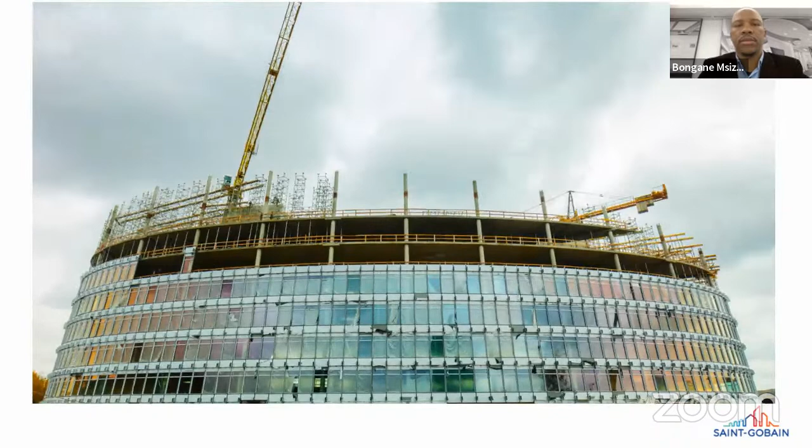Customer proximity: we commit, beyond our local footprint, to always be by your side as a reliable, expert business partner. Innovative solutions: we commit to constantly anticipate your needs and bring added value solutions. Performance: we commit to respond to your challenges by bringing trusted solutions which offer productivity, financial benefits, and quality finish, delivering the expected performance. Sustainability: we commit to care about people by making installation and indoor environments more comfortable and safer, and to care for the planet by reducing buildings' environmental impacts. Everywhere, every day, we care about building better for people and the planet by offering solutions that deliver sustainability and performance to drive the transformation of the construction market, making the world a better home.

Thank you for that, I hope you've all enjoyed the short clip. This basically gives you an overall summary about Saint-Gobain's offering and positioning in the market in driving sustainability, with innovative solutions that are performance-driven, with a key focus being sustainability.

So I'd like to take this opportunity to break it down with our key focus areas, which is customer proximity — in all that we do, we will be there to support you in projects that need our solutions, and we will walk the journey with you. Innovation — we are constantly innovating, responding to the needs of the market, so Saint-Gobain develops solutions that are fit for market with the key focus being sustainability.

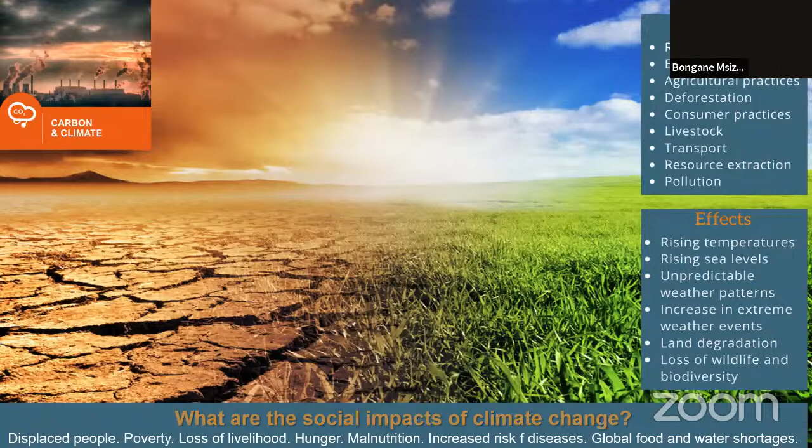Looking at the three pillars in the sustainable built environment, we're looking at carbon and climate change, resources and circularity, and health and well-being. With carbon and climate change, one would ask about the different causes and effects. In summary, what are the social impacts of climate change? We're all aware of the recent change in climate, which has resulted in some areas experiencing loss of livelihoods, hunger, malnutrition, increased risk of diseases, global food and water shortages, and displaced people. So we have a key role to play in mitigating and addressing some of these challenges.

How do we do that? When you look at resources and circularity, we should have an interest in understanding the production processes and how we acquire our products. Through that process, we can understand what opportunities exist for producing new, recovering existing, recycling, or reusing, thereby reducing the need for waste generation. It's critical that we understand that process, and from the supplier and manufacturer's perspective, understand what their product presents - the lifespan, opportunities for reuse for different purposes, recyclability, and how we can reduce waste generation on our sites.

The health and well-being pillar, we're looking at a summary here, we'll go into details later for each component. We're looking at cleaner air quality, which has a lot to do with indoor air quality, because we spend about 90% of our lives indoors. Therefore it requires interventions to understand what products have to do with the healthiness of the environment and how they affect or improve our well-being. We need to be cognizant that our decision-making in product selection and project implementation does not pose any harm to the end user or occupants of the space. Improved health equity is very important. Net zero commitment - this is the 2050 Paris Agreement.

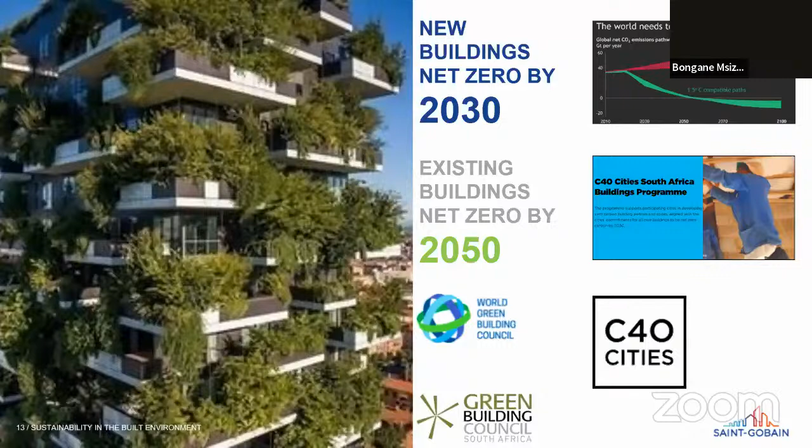These commitments are obviously influenced by the World Green Building Council with the support of Green Building Council of South Africa. Every professional in the space, particularly when it comes to buildings of a particular size, and also the sectors - in this case being public buildings - have the immediate impact where they have to get them to be net zero by 2050 on the existing stock, and any new build should be targeting net zero by 2030.

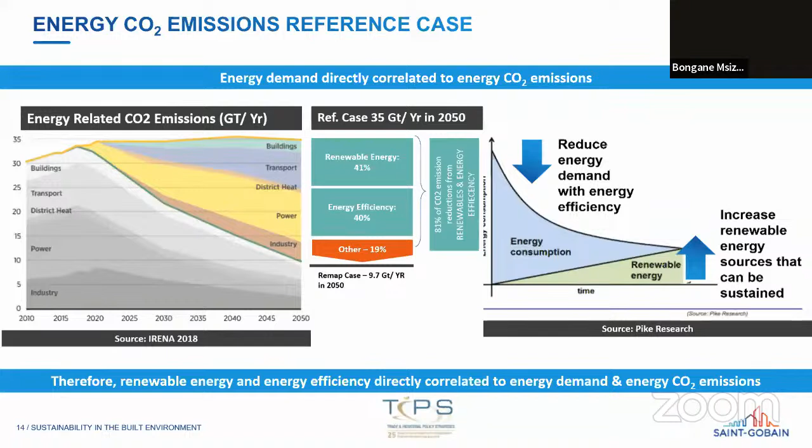This information here is backed up by TIPS in the South African context - this is Trade and Industrial Policy Strategies. So all these agreements are actually driven through various organizations. Buildings are part of the problem, and it's a continuity that we need to put mitigation factors in place.

We use about 33% of energy globally, and it's all in buildings. The image there, for me, I always highlight the fact that you've got a night scene where buildings are all lit, and probably amongst those buildings, not all of them are residential. Therefore, some of them should not be using energy during non-use periods, which requires various interventions as professionals to implement.

Also, about 40% of solid waste is generated on construction sites. Now, that is something we can look into when we explore our resources and circularity - how can we minimize this impact, as we've highlighted, how we can reuse some of those facilities, lessen the need for demolition, and obviously convert them for various uses.

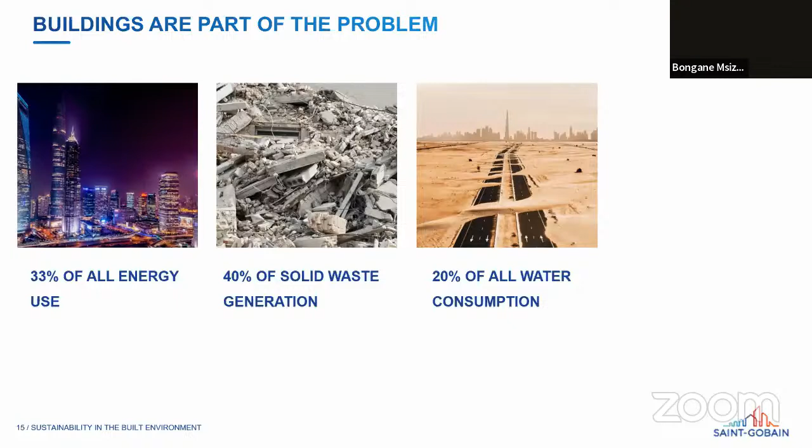20% of all water consumed is in construction as well. Now, this is a very scarce resource - I think the Nigerian market is probably facing the same challenge. Now, this needs to be lessened. And how do we do that? We can deploy alternative building technologies, which will actually reduce the pressure on this scarce resource of water.

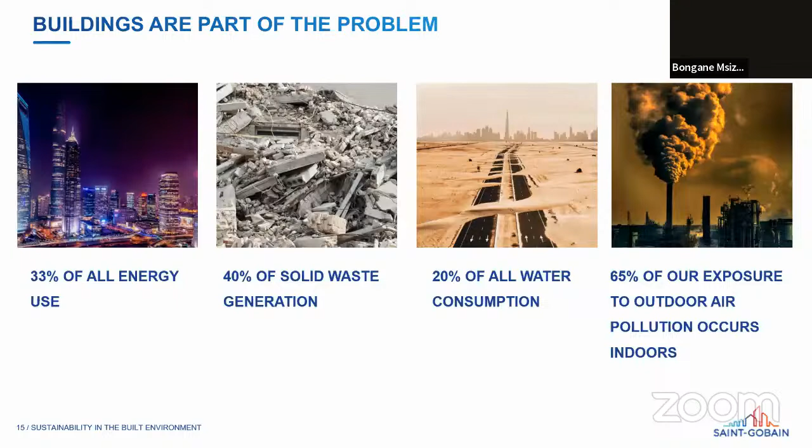With the industrial side, you've got 65% of our exposure to outdoor air pollution that occurs internally. What that means is, with all the pollution that happens externally, it finds its way to affect our lives in terms of indoors. So we need to also have that reduction and put mitigation factors to the exposed percentage so that it does not have a bad reaction to our lives.

Straight into sustainability, we're now going to unpack the various factors and the drivers for sustainable buildings. We see it in two folds from a Saint-Gobain perspective. What does it mean for buildings?

We're looking at sustainability being better for the planet, with a focus on energy and carbon, resources and circularity, and being better for people, looking at health and safety on job sites, as well as health and well-being indoors. On the performance side, we're looking at better economical value, productivity, cost of ownership, and then better quality, reliability and finishing aesthetics, which I think for every building, it has to respond to all of these drivers.

Now, reduced building-related environmental footprint for the planet means we need to take care of our energy and carbon generation and usage thereof. Increased energy efficiency is one key intervention that one can deploy in their projects, along with increased use of renewable energies and reduced embodied carbon emissions.

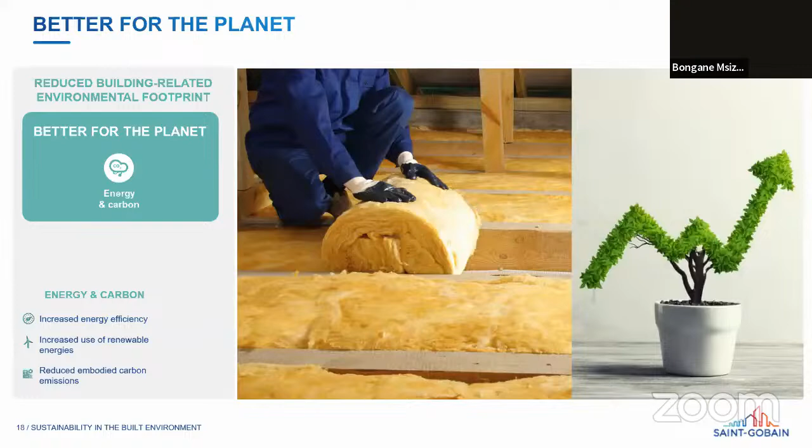So what that means is, as we highlighted earlier when we defined sustainability and why we as architects are affected, is that we need to understand our material selection and what impact they have on the environment and also on the building itself. We need to consider that in our day-to-day actions when we design, and understand what impacts this will have on the planet with regards to energy and carbon emissions.

Expanding on Better for the Planet, from our South African context, we've got energy efficiency, which is driven through sustainability and energy use in buildings. What does that mean? We've got legislation, and I would love engagements because of my non-visibility of what the Nigerian legislation is and what measures are in place. However, this is not limited to South Africa, which is why it's of interest for us to share.

So we aim to reduce energy needed, minimize that whole 33% globally, combat climate change through various interventions, and also have a positive macroeconomic impact with the reduction in energy costs.

Now, this image here would relate to probably most of us, in that the various building elements have a role to play in how they actually minimize or keep the heat for the level of comfort. The various components pose a risk. In this case, your roofing element, you could lose potentially up to 25% if it's not well treated with the necessary solutions. Your walling design, if it's not responsive to the climate, you could also potentially lose about 35%. Windows 10%, doors 15%, and something that is not commonly addressed, your floor, which you have an opportunity to also insulate, minimizing a loss of 15% in energy.

Now, with all of this loss of energy, it requires you to use energy to create some level of comfort. So if we design quite well, and if we design for the climate that we're in, such that it responds positively to the occupants, we can actually minimize all this risk.

Looking at the energy efficient house, it's just a typical image that really highlights various interventions that can be deployed. Not only is it reliant on passive design through building elements, but we can look at high efficiency lighting solutions and appliances as well, which complements the entire envelope of the building. So we have an opportunity there to actually address these challenges through various mechanisms within our space as designers.

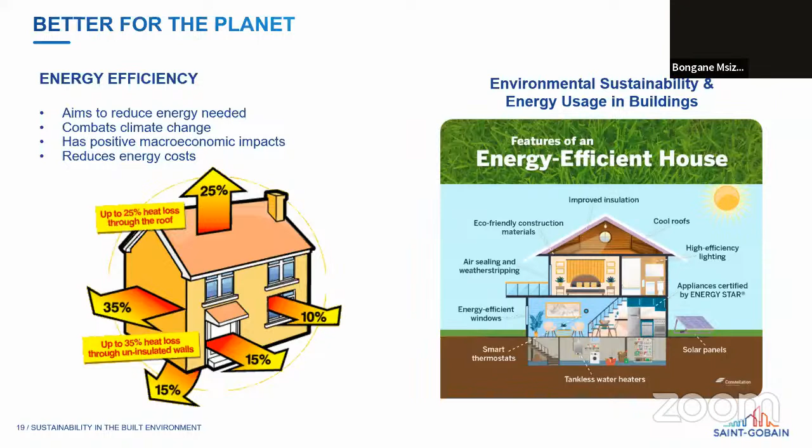I would like to highlight some legislation from a South African context. It's just a brief indication, which I probably believe you might have something similar from the Nigerian market, is that SANS 10400 XA legislation helps us understand and also put measures in place to make sure that our buildings are as energy efficient as possible, and we've got a positive impact towards climate change.

Now, what this means is that an opportunity is always there for new build, obviously, but also we're looking at existing buildings that are actually earmarked for renovation. So at any given stage, when you have a renovation opportunity, you also have an opportunity to actually better improve the level of comfort, make the building as energy efficient as possible, and depending on the level of targets, you can also get some level of Green Star rating to achieve that.

Now there are three ways in how you can actually achieve the compliance. From a South African market, which I think will be similar in the Nigerian market, you've got various energy zones. In this case, we are defined by various provinces, which I think will be something similar in the various states in the Nigerian context.

There are three ways of meeting this. One is to design and construct buildings that are energy efficient through rational design. This would be through the appointment of an engineer or specialist capable of rationally designing a building that complies and meets the required target.

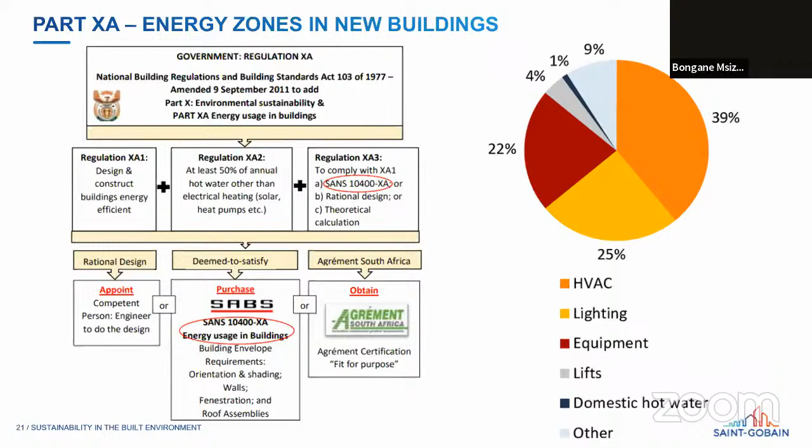Various equipment can obviously be put on timers, only functioning when needed. Lifts can be limited to various floors - perhaps you don't need to use a lift between two floors, except if you're going to the third floor. Such things should be accompanied by legislation; it is a suggestion. Domestic hot water boiling equipment is another area where we can find ways of improving electricity consumption in buildings.

The rationale behind the National Building Regulation in this case is that you also want to look at your biggest energy user in residential buildings, which is your hot water supply. This means the right treatment, making sure your geyser system is well insulated together with the ducting that distributes your hot water, and partially so on the incoming cold water.

Your HVAC systems should also be treated to be as energy efficient as possible, with focus also on your facade system. As much as one could see it as glass looking all beautiful, it has a role to play from an envelope structural point of view in the reduction of need for heating, cooling, and ventilation. So in designing these systems, you need to understand your product selection, what performance it will deliver, and how sustainable it is.

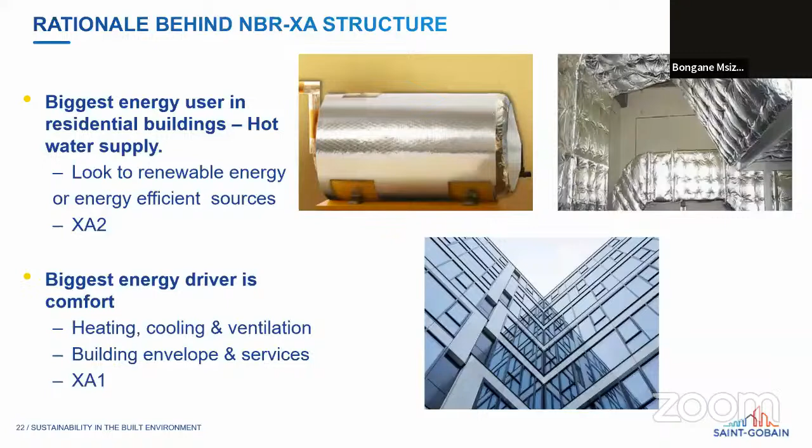There are various ways of addressing this. Again, this is in the context of our space, but I don't think it will be anything out of your context, as we understand the various building methodologies.

From a South African context, there has been a law passed to try to get as many buildings built with a cavity wall as possible, with our SANS revision edition 2. In building that, you can have a different composition of walling for interior and exterior product, but also you can have a combination of one product system.

With an insulated opportunity, you actually get much better performance, looking at the middle diagram here. On the right-hand side, you've got different zones categorized by various provinces and what their energy R-value requirements are, which is mandatory, as you can see there.

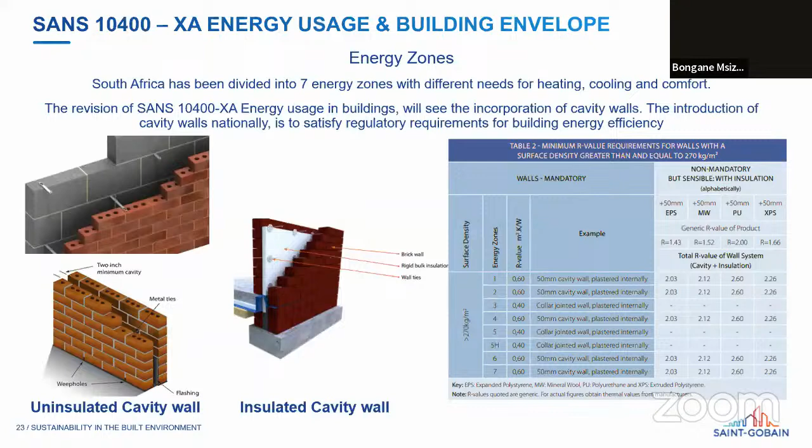So I would also love to understand whether you have some form of guideline to this, to understand what your targeted R-value performance is for your perimeter envelope. It would be very interesting to understand how this would be treated from a Nigerian market context point of view. But I believe it's an opportunity that all of us can adopt, one or two of these solutions, to better improve how we design our buildings.

Some of the alternative solutions are focusing on the left top image.

We're looking at an existing structure here that might not have the necessary required performance. However, you have an opportunity to dry line, meaning improve the perimeter of that wall through various interventions, introducing insulation, but also improving the internal finish, and therefore holistically achieving a whole lot more than just a perimeter wall.

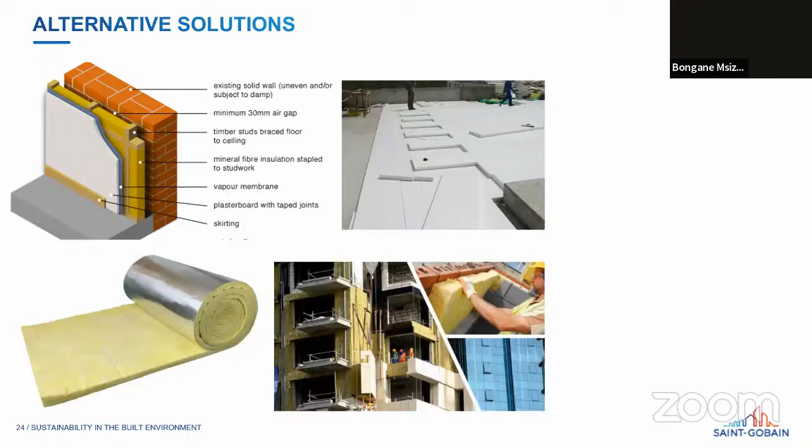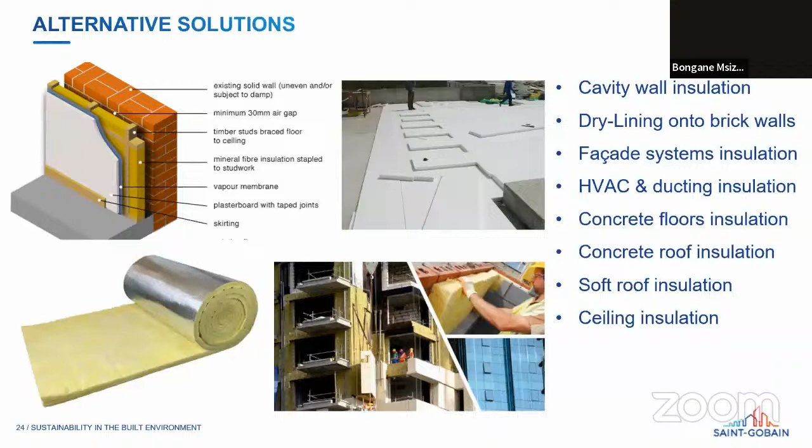Your roofing system can also be insulated, which gives you better performance there as well. Some of the areas where our insulation solutions can play a role is dry lining onto brickwork. Facade systems can be insulated, HVAC ducting, concrete floors, concrete roof, and also soft roofs, as well as ceilings. That is some of the interventions you can introduce, making sure that your building envelope performs as optimally as possible.

So great opportunity for you to look into that, whether such interventions are in place or whether there is a need for them to be improved.

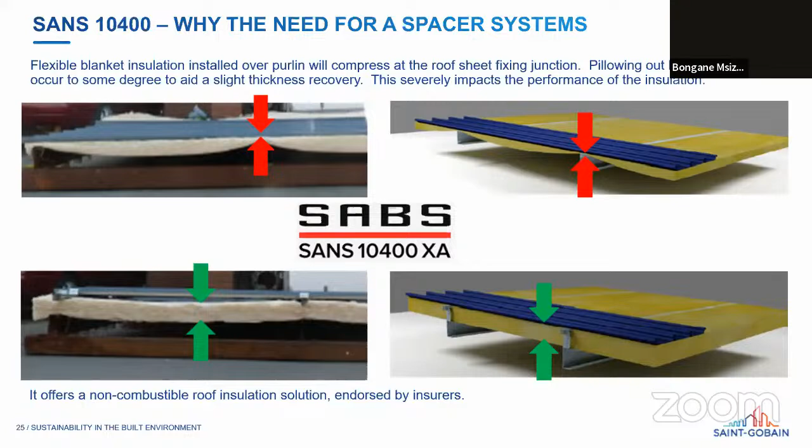Opportunities are there for us to encourage design according to relevant legislation or the laws of each country, province, or area. Energy cost is escalating annually. I believe this is a challenge in Nigeria as well, along with the availability of energy. So if we do put various interventions in terms of how we use natural sources to power our structures, houses, or buildings, given that supply of energy is always at risk, if we can put some interventions there, that will be great.

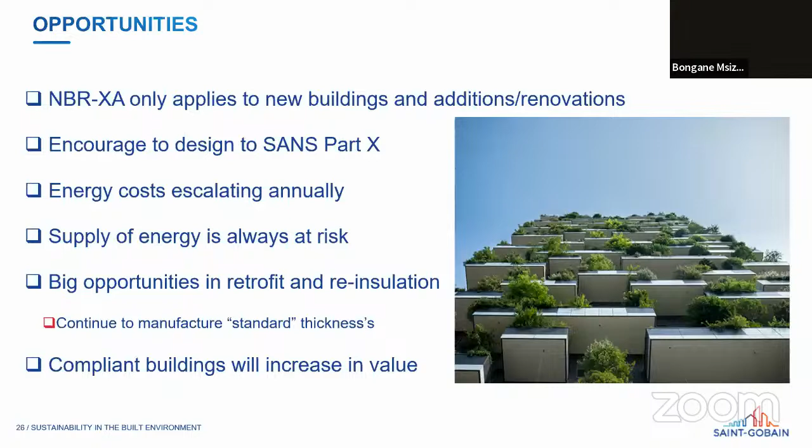Buildings that are compliant will increase in value. So this is something of importance. We need to really look into how we can attract the right investment, and in some cases attract tenants, by making buildings that are as comfortable as possible, buildings that are actually beneficial to the end user and have a positive impact.

With that said, better for the planet, we need to also look at how we can decarbonize. How do we decarbonize? We deploy energy efficiency solutions to the maximum degree in order to reduce the need for power, or the needs that have to be met within the usage space.

We will decarbonize the power supply. This is now talking to alternative power supply, through the decarbonization of electricity supply. Then we will also look at economy-wide electrification, pushing clean electricity into various sectors. Lastly, we can look at zero carbon fuels, trying to use as little carbon fuel as possible for the remaining areas that cannot be electrified through alternative measures.

How do we do that? In the context of new buildings, you should have some legislation that governs and prescribes the various options, and what tools are available, and various solutions to adopt.

On existing buildings, you can also deploy a system where you need to firstly understand where your energy consumption level is. In our case, we've got energy performance certificates, which measure the current use of energy. Once you've understood where your usage is, you can put interventions and measures in place to improve on this, so that you lessen the pressure on the system.

On new buildings, you've got an opportunity to immediately look at how your space is contributing positively through the ESG strategy. You can also look at the Green Building Council of your relevant zone to see how you can support new buildings to meet the various criteria, ensuring that you are being seen to aim for a much more sustainable environment. Definitely an opportunity there to look into.

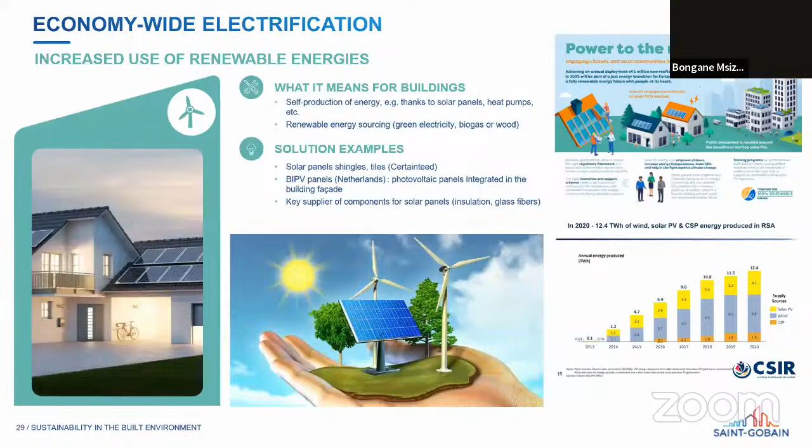Just expanding on economy-wide electrification, we're looking at solar panels over your roof. I think there is an almost obvious solution there, but we also need to look at insulation, glass fiber solutions. This is something we need to really explore as professionals, to make sure that we've got this opportunity and maximize the use of various solutions to electrify our buildings through the wider range.

Zero carbon fuels - we're looking at building life cycle assessment. It's another indicator where you can understand the warming potential measurement, so you can ascertain what that means for your building.

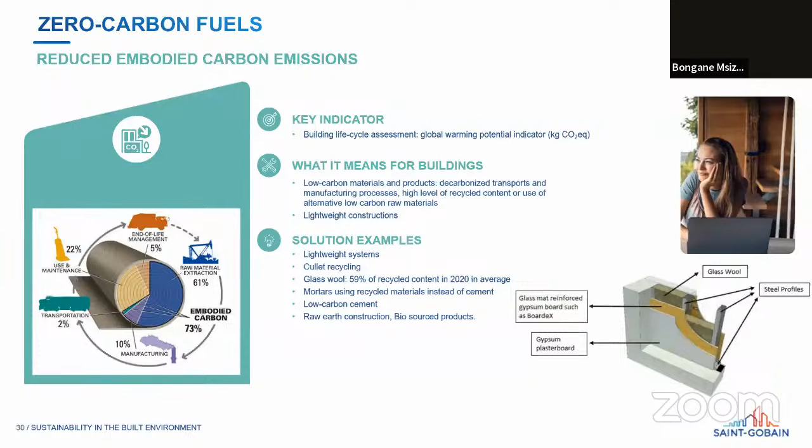Some solutions for achieving this aimed performance are through lightweight systems, looking at glass wool usage, which it's important to understand is recyclable, or rather the products used in manufacturing glass wool have been recycled. Mortar usage also generated from recycled material. Low carbon cement - I believe various manufacturers are putting interventions in place to show their positive contribution in this case.

Further to that, you have a reduction in embodied carbon emissions. What that means is through your design and planning procedures, at planning stage you have 100% opportunity to explore nothing, but rather see how you can work on the existing stock. Through design, and if there's a need for that, you can look at building less, maximizing use of existing assets. However, if you have to, you need to develop a new building.

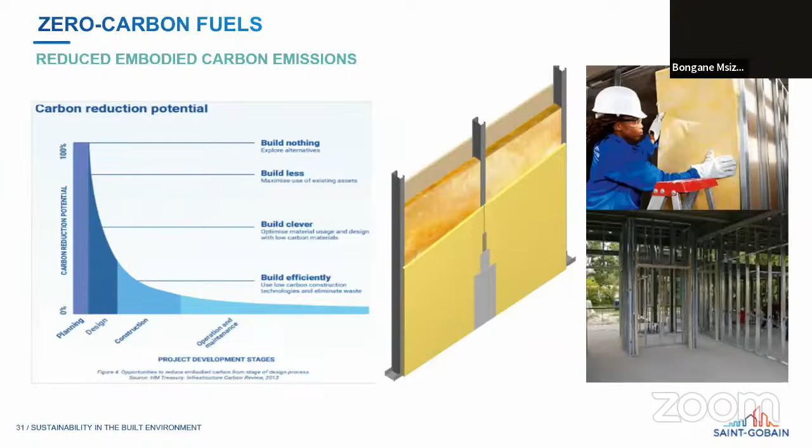You need to build clever, so you optimize your material usage, your design with low carbon material selection as we've highlighted earlier. You can also build efficiently during construction through alternative technologies, and minimize or eliminate waste altogether. Throughout the operation and maintenance of the building, that should be maintained, understanding the impact of what your product selection means for you.

Further to that, we're looking at resources and circularity, for the focus of it being better for the planet. We've highlighted the reduction in non-renewable resources, reduction in freshwater consumption, increased lifetime and use rate. Now, what does that mean?

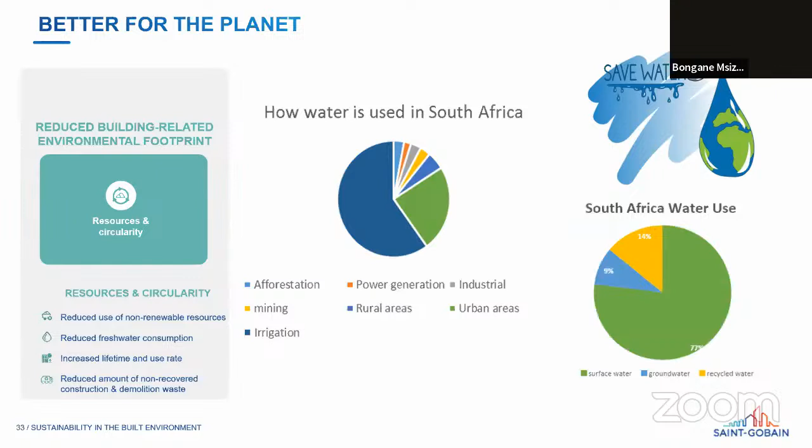It means you also need to understand where your water usage is from various sectors. Once you ascertain that, you can put measures in place for the various sectors. In this case, just on the South African market point of view, you can see where the various water consumption is sitting at, and there's definitely a need for us to put interventions in place to lessen the pressure on this scarce resource.

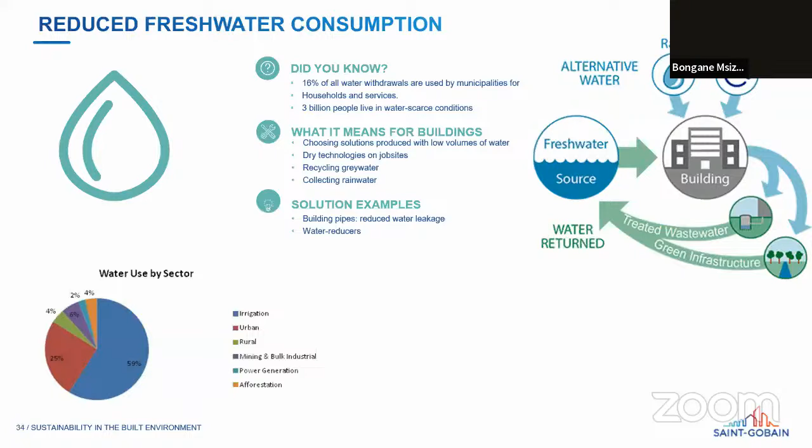More to that, I think we started designing with this in mind, where we collect rainwater. We'll see how we can make it work for the buildings, use it for various reasons, so that we lessen the use of potable water in running or operation of the building. So those various interventions that have been explored, I think as designers we should be encouraged to keep doing that, and also as manufacturers we should be seen doing such.

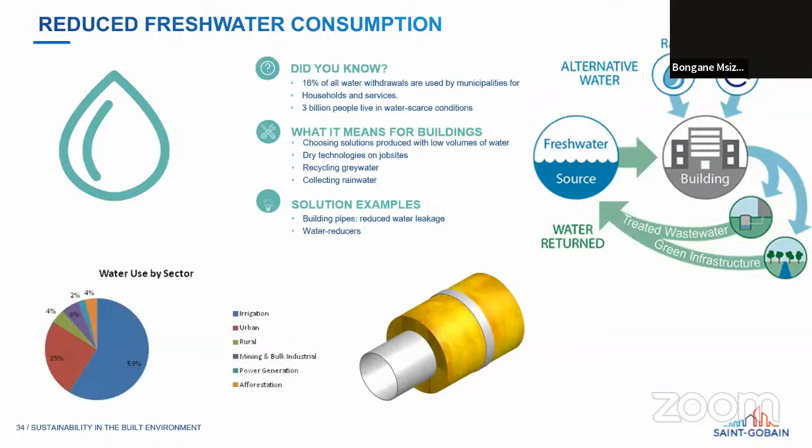This example here shows insulated ducting. One might ask, how does that relate to reduction of freshwater consumption? The truth is, if your geyser is not well insulated, before you get your hot water you probably get cold water, and quite often that water goes down the drain. Now that's water wasted - it's clean, potable water which could have been used for other reasons. If you present an opportunity to insulate, you can minimize that, because your water will be kept at the right temperature, or rather at a usable temperature, as opposed to going directly down the drain.

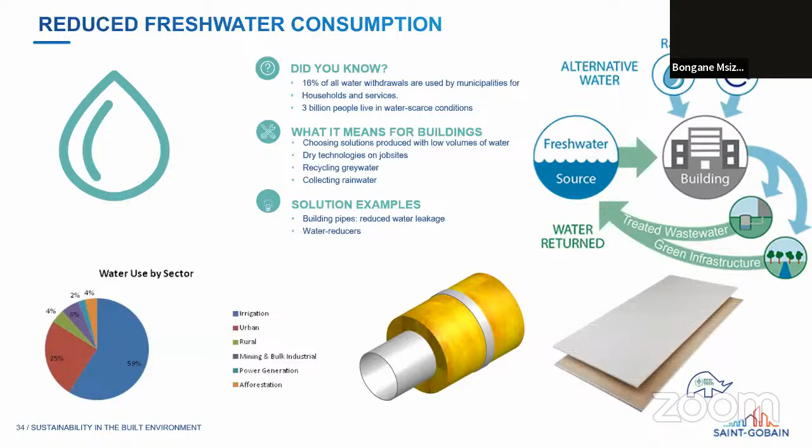Again, we've got an Ecotech solution from Saint-Gobain's point of view, where we produce products that use less water, less energy, and that's a technology we've deployed in showing the effort to minimize also on our carbon emissions.

So turning waste into energy is an opportunity I think we should all explore - perhaps not directly, but the various professions within the built environment can look into this, because most of our landfills have got so much waste that can be converted into energy.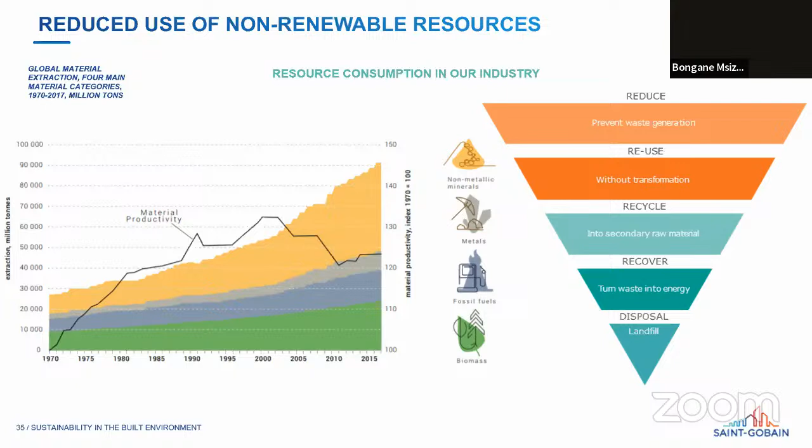And I think that is a technology that is yet to be explored from an African market perspective.

Use of non-renewable continues here with the gypsum boards. Typically that's our space there. You get custom-made sizes, which again minimizes the risk of waste generation on site. Recycling services for plasterboard, mineral wool, and glass. So these products give you an opportunity to recycle what exists if you're taking anything out of site, and also present an opportunity to turn it into secondary use where possible.

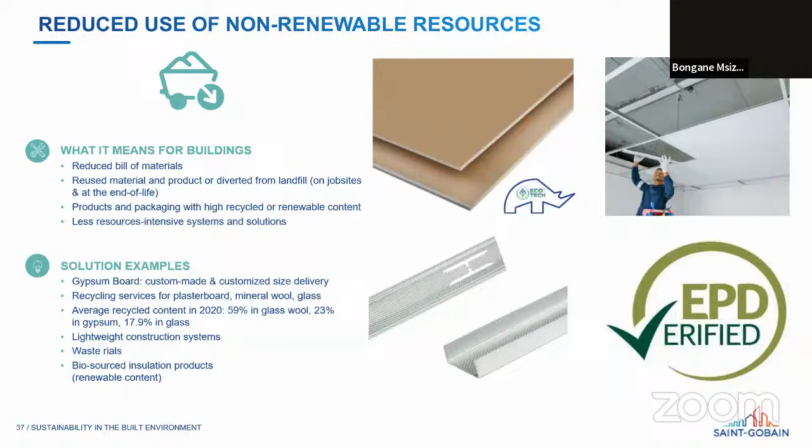Lightweight system construction, which is a focus for today, all of these various interventions from a Saint-Gobain perspective present that opportunity. Bio-sourced insulation products, which again is renewable content material that is used. Now what does that mean for buildings? It reduces the bill of materials with an understanding of what has actually gone into the manufacturing process.

Better for people. I think everyone is interested to make sure that whatever they do on a job site, they actually comply to safety, health. They've got an opportunity to minimize accidents, they minimize the risk, and more than anything, they adhere to the necessary training and policies that are supposed to be adhered to.

So what does that mean? It means we need to have a reduced exposure to hazardous substances during installation. Generation of dust should be minimized as much as possible. And it also has to do with the kind of products you've selected, which generally talks to improved working conditions.

If you can have a clean working environment, you can actually minimize and better have a positive contribution towards the well-being of people. Now in the context of a construction site, some challenges that are present depending on the environment and how you construct is that you've got musculoskeletal diseases as a result of carrying heavy material, which could somehow affect you. But you can also have respiratory diseases as a result of how much dust and how much hazardous substances you're exposed to.

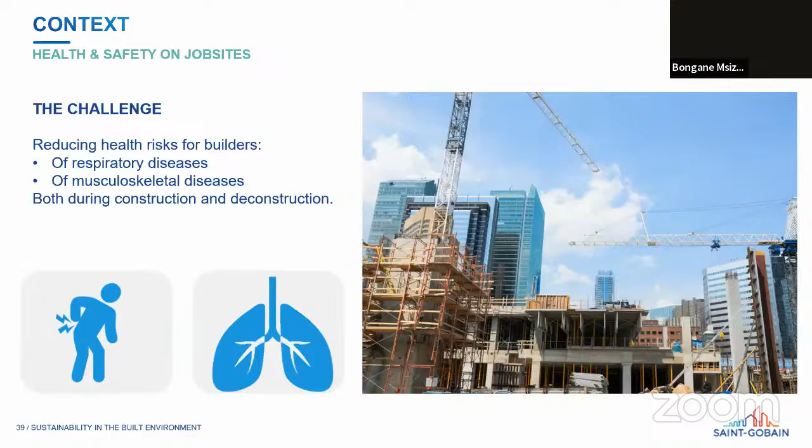So we need to really be cognizant of that on job sites. Builders' exposure to hazardous substances should be minimized. And how do we do that? We actually have to understand the products and whether it has any VOC that it releases, or at least some limited VOCs to some extent, released into the environment. So your product selection should be such that you understand the impact that will have on job sites.

So how do we determine that? It's through the various mechanisms that can be put in place to ascertain the level of hazardousness the product has to people working with it. And how do we do that? As Saint-Gobain, it's through our innovative product development. We're constantly looking at addressing some of these challenges, minimizing the dust and making sure they're as non-emissive as possible, so we can do that together and understand our product selection on our job sites.

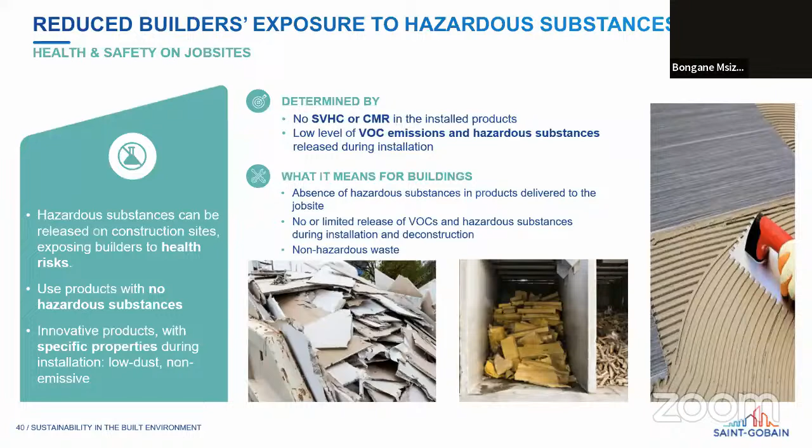Further to that, we're looking at indoor well-being of people. So what does that also mean? It means how does the environment that is now finished have an impact on the end user? We need an environment that is good for indoor air quality, better acoustics, making sure one experiences a space the best way they can, better thermal comfort, which looks at how the building has been treated on the envelope and various elements, and how that gives a level of comfort, which in turn will minimize the need for energy usage, and better visual comfort, which is also very important, because when you walk into a space, there are so many ways you experience it - visually, acoustically, thermally, and through indoor air quality.

When you look at acoustic performance, it will take you about 15 minutes to regain your concentration.

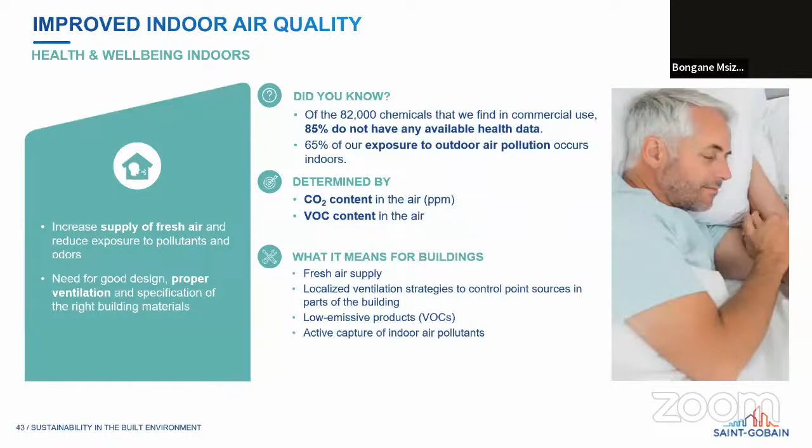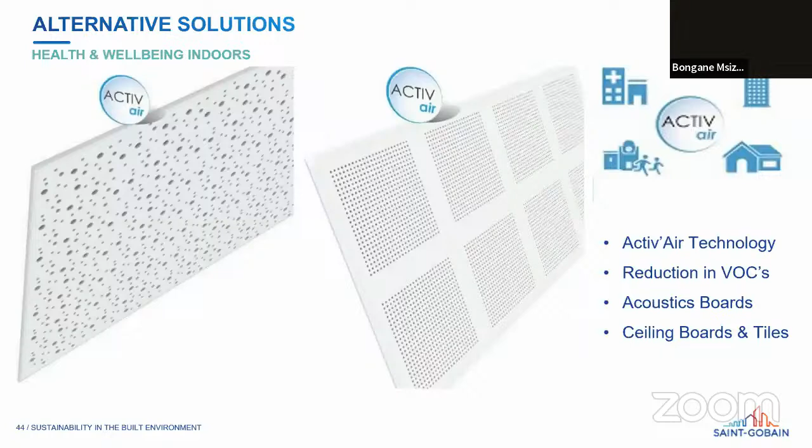These are just some of the alternative solutions one can consider - products that have Activ'Air technology in them, which means they help in reduction of VOCs. They perform on the acoustic side of it, and they can also give an aesthetic finish within the space.

Thermal comfort - as we know, we all want to be in a comfortable environment at any given stage. So it should be quite key for us to understand how the space we've designed is going to actually contribute. Once again, your envelope is an opportunity to look at how it will respond to the end user, the entire structure, and the services within that space.

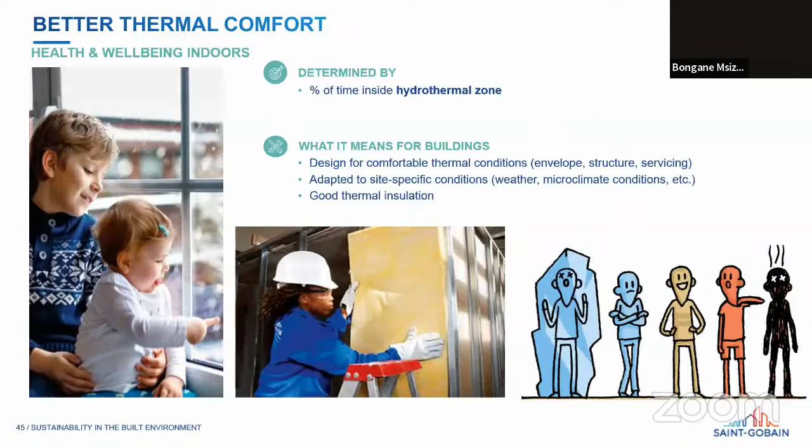The four drivers for sustainable buildings, as we highlighted earlier, we're looking at better economic value now in terms of performance. What does that mean? We need to design efficiently at the design stage of the building.

At any given stage when you have an opportunity to design a new building, the first thing in mind should be how efficient can we be with the operation of this facility, and what various interventions are available in your market to deploy such that the building is as energy efficient as possible.

We're looking at the efficiency of the construction process as well. What alternative solutions can we deploy versus the conventional method? Optimize the cost of installation, understand the sourcing of the product, the installation, and what greater benefit that will present as well.

It's not limited to that - any new technology comes with an opportunity to generate employment, which we'll touch on later in our training, and better economic value.

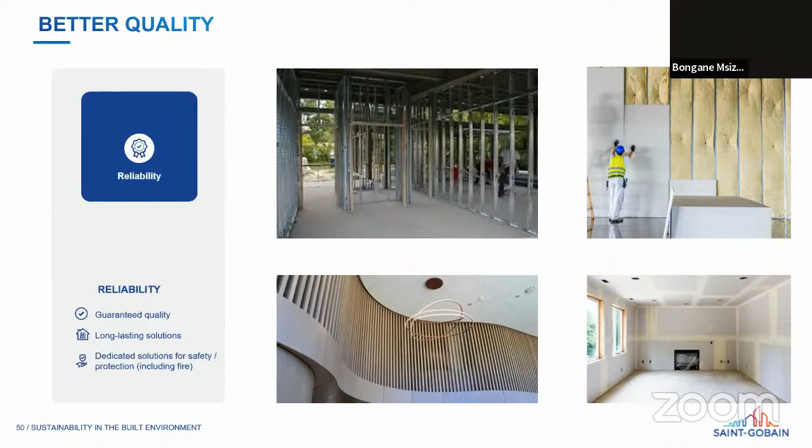Every system deployed into a project would have been developed to respond to the needs of that project. Better quality drywall gives you a variety of finish levels, from level 0 to 5, so you get to choose what level of finish the lightweight system gives you. It also gives you various color finishes, versatility on shapes, and a wider range of architectural possibilities. As you can see from these images, going lightweight gives you endless possibilities in how you can achieve quality.

Now looking at some international statistics, some of these stats might be a bit questionable in terms of the energy efficiency scorecard. It's also interesting to understand where the rest of Africa is in terms of participating, and if there's an opportunity to share some of that data, it would be very helpful. In this case, South Africa seemingly is the only participant on this score sheet.

However, you also look at how these areas are measured versus other areas. Someone might question other regions, and I have my own questions too. See if you agree or disagree with one of the ratings. The highly efficient are marked in green, I believe. I tend to have a problem with color. Blue is marked as efficient, with purple being middle, low efficiency more on the orange side, and the lowest efficiency is the red marked area.

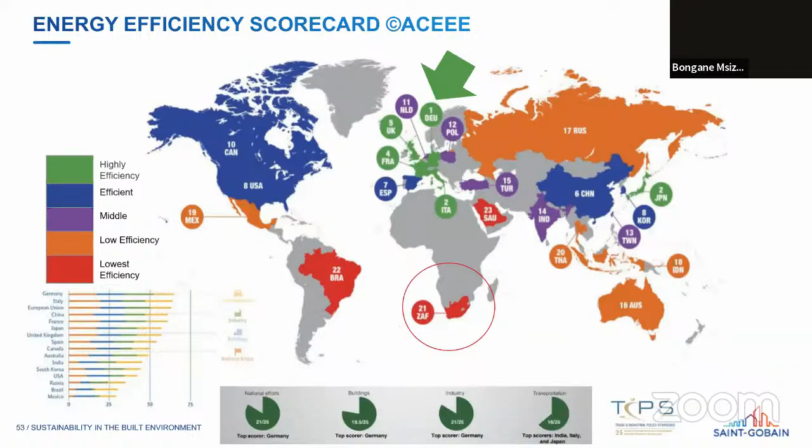So this is just some international scoring, and you can see the European market seems to be leading, at numbers 1, 2, 4, and 5, versus a total of about 25 in this, which we'll look into shortly. Now Germany is high up there in terms of household leads on energy efficiency. These are all developed markets, and China is right there at number 6 when compared to the US, Japan, UK, France, and Germany, as mentioned.

Now the rankings highlighted earlier show your total scorecard across various industries - buildings, industry, and transportation - that's where the measurement was taken.

South Africa is sitting at 23 against 25 countries versus the world. That's an overall score, but when you look at buildings, we're not doing so bad—we're sitting at 17 versus 25. Looking at industry, there's really a need for us to improve in that space. And transportation, we're also sitting at 22, so it means we have an opportunity to even do better.

What that means is buildings plus industry in the South African context are basically consuming about 71% of energy demand. It's sitting in buildings and industry. Therefore, we need to really improve that, which will ultimately put us in a better position against our international counterparts.

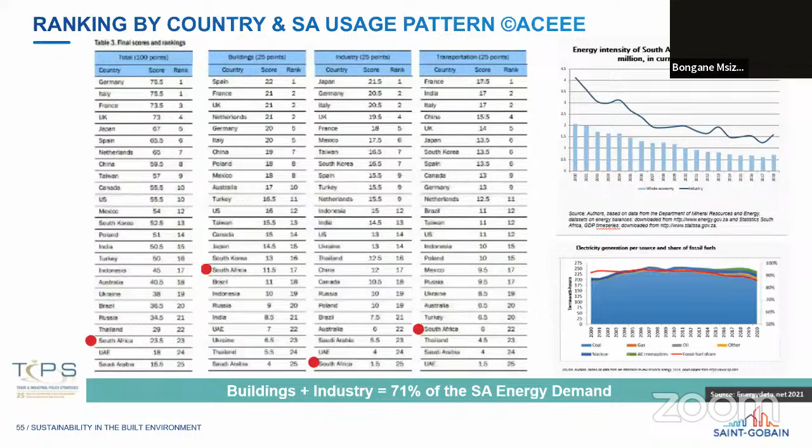Increased energy efficiency—the diagram on the left literally depicts what is on the right, but I'll focus on the left-hand side. Limit energy need for heating and cooling, which shows your initiative in minimizing energy use. Final energy: select highly efficient equipment. We've discussed that; it's an opportunity to do that.

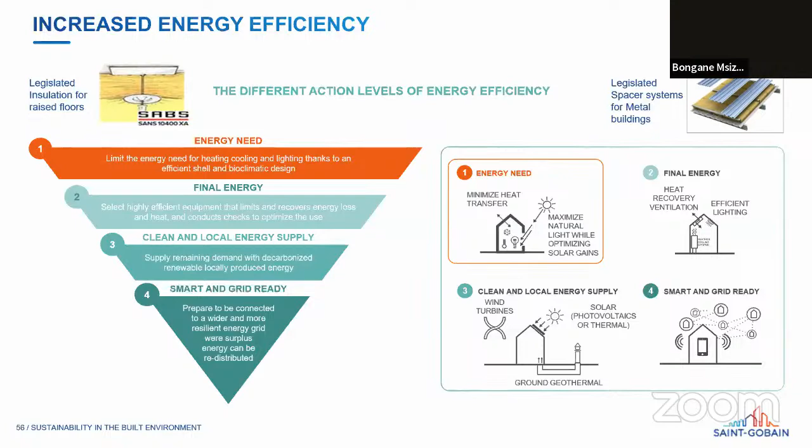Clean and local energy supply—let's look at alternatives in decarbonizing through renewable, locally sourced energy. And then smart grid ready: prepare for a wider and more resilient energy network if we have the opportunity to do that. So we can definitely increase our energy efficiency through the various measures indicated.

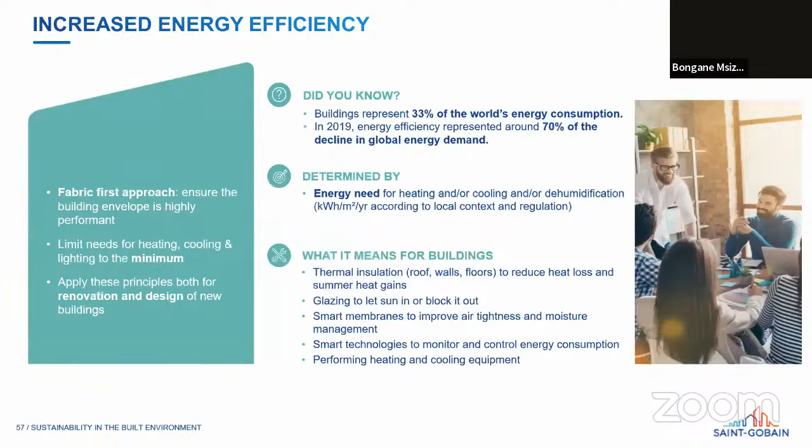This is just an expansion of that, which highlights again 33% energy consumption. I'll go through that. Something to note with insulation is that you've got a possible lifespan of 50 years, which is a product you can put in as an almost immediate intervention to make your building as energy efficient as possible. The product can save up to 300 times the energy consumed and the CO2 emitted in its production, transportation, and disposal.

So you've got a product here that, by using it, you would have saved and played your part in minimizing the CO2 impact, because it would have already been through that process. Having it in your building minimizes, or rather has no negative impact, and the energy and CO2 balance switches to positive in just 3 months. So with an insulated building, you'll actually tell the difference within 3 months of installation of such an insulation solution. Insulation is one key part in increasing energy efficiency in your buildings.

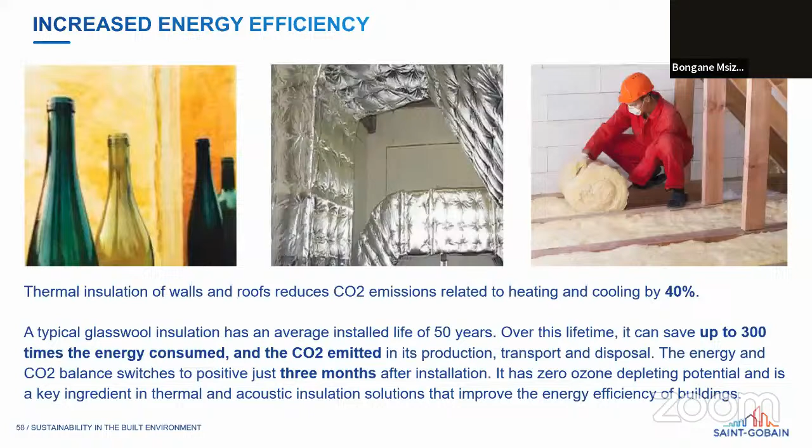Some case studies were done in Cape Town, where a block of residential buildings was certified to have had 41% energy savings, 30% water savings, and 36% less embodied carbon. Now that's through your product selection and understanding.

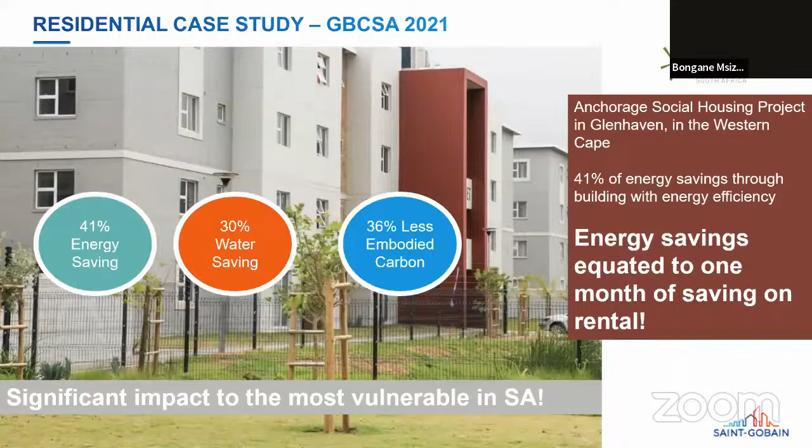Further to that, some science-based targets—this highlights what our commitments are by 2050, versus what other businesses have committed to. We've got a commitment to reduce industrial water usage by 50%, and another target for scope 1 and 2 reduction of 33%, with scope 3 being 16%.

Circular economy—again, a total target of 100% recyclable packaging with 30% recycled or bio-sourced content. So we're working hard to make sure those are realized in our space of production. And product stewardship for all group products: we're looking at 100% LCA. That's our target as well, compared to 2017, now for 2030 as Saint-Gobain business.

And obviously other measures in place, which is your life cycle analysis. It's something that, through your product selection, you need to have visibility and understanding of, and any manufacturer should be able to share this information with you.

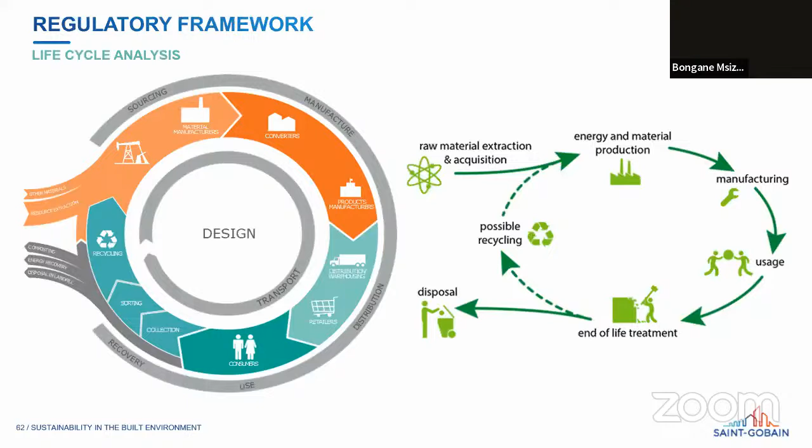Industry tools and certifications—we've got EPD verified certification, we've got Green Star, and these are supported through Green Building Council, the EDGE tool, and the Zero Carbon Pledge. There are other mechanisms available in the market; it's not limited to these tools, and we are working closely with various stakeholders in understanding the needs for each of these tools.

Skills development—with any innovation of products and systems, you require the manpower. In the Saint-Gobain space, we've embarked on a partnership where we've got a Youth Build Academy, where we train the less fortunate who probably haven't been through higher tertiary education. These should be high school leavers who qualify to be taken into a 12-month program where they get taught on the various products, installation, handling, and basically just interacting within the construction market.

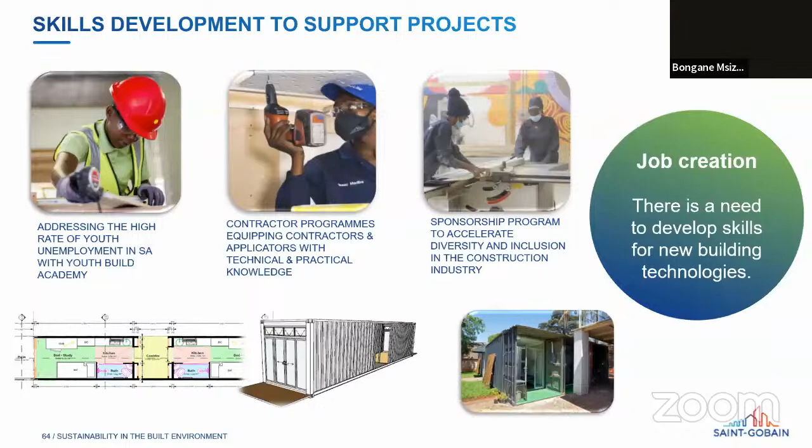Towards closing, on energy efficiency solutions, we're looking at lightweight facade solutions and performance glass, as my colleague alluded - that was the start of our business, manufacturing glass, so we've got that component within the business. Building insulation for various building components and elements, heating and cooling, which means we address HVAC and water heating system solutions. With that, we address energy efficiency, thermal comfort, acoustic comfort, fire safety, and product availability is guaranteed.

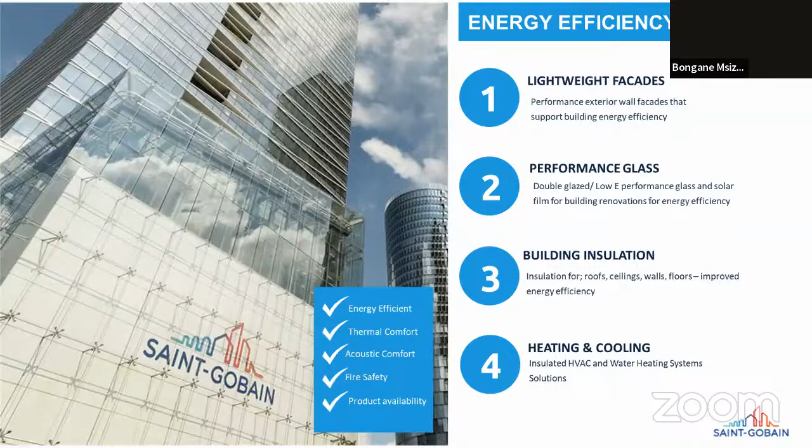Now what we do is we say, let's build better together. And how do we do that? Through knowledge sharing, engagement with accredited professionals within the business, qualified technical teams, site inspection, and on-site support. Some of the tools, as mentioned, are your EPD LCA certification, tested and approved systems, building certification tools, building calculators. We've got BIM support files of our systems, and we support through WinQS for quantity surveyors.

Part of the trainings we offer include CPD programs, contractor training, on-site training, and an experience center in the context of South Africa, where you get to come and experience our space with the various products that have been installed. We also offer some short courses, as mentioned earlier.

Now this is just a reference to some case studies of recently completed projects. I think it's just to give confidence for people to understand where we are. Also a summary of how we arrive at system build-up - we will categorize your space, understand and design it, and put it across as cost-effectively as possible, again in line with the requirements and performance of the project.

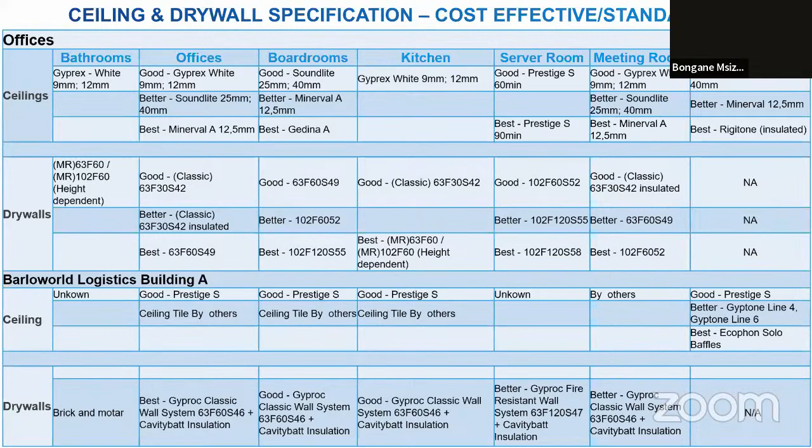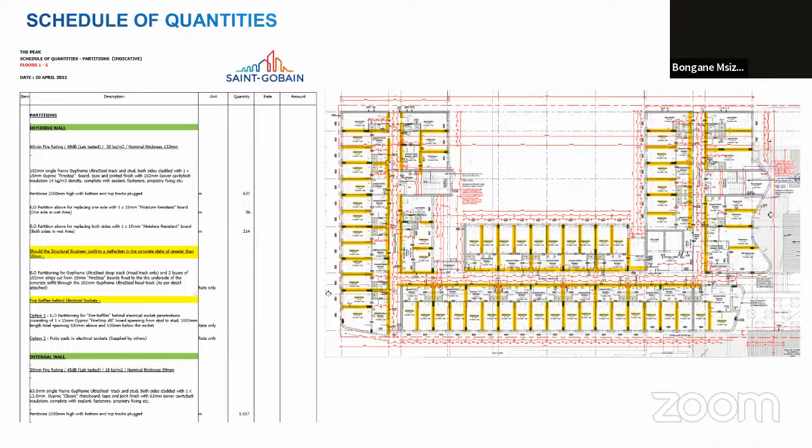Some examples of how our engagement will go about - we will highlight a design for various walling solutions, and with that we can help you build up a bill of quantity per system and quantify it, getting it to the market. I'm hoping an opportunity is there in the Nigerian market to actually support in this manner.

This is just an indication of some recently completed projects. This is an existing commercial building that had been converted to student accommodation, and this is where some of the lightweight solutions proved to be a solution because of the limitation on weight, but also considering other factors of health and safety, and the speed of installation. Being in the city center, you're going to have challenges of transportation - now you can transport bulk quantities of drywall due to the nature of them being lightweight systems.

So the South African team were able to support the developer in working out the solution that's fit for purpose and addressing some key focus areas, which is the speed of construction, the fire safety compliance of the system, reduced material waste and usage through standardization of sizes. So you get bespoke size boards so that you have that reduction, reducing water use on site, transport saving, ease of handling, ease of service integration through our cavity system, and dry lining as we highlighted earlier along the perimeter.

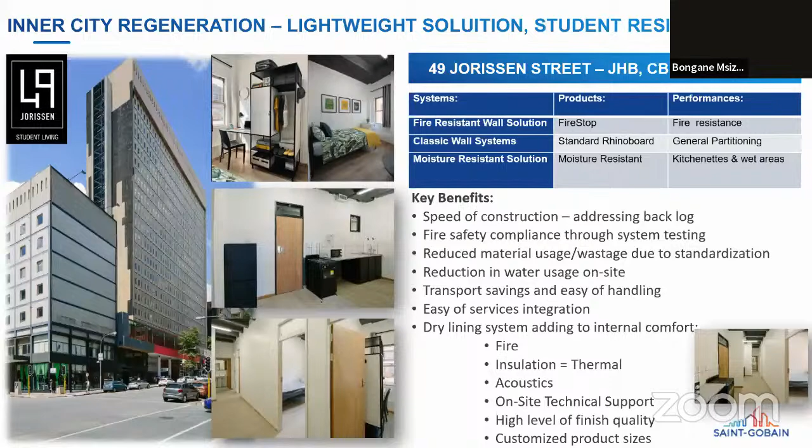And with that, we're able to achieve the following: fire compliance, insulation through thermal comfort, acoustics with the site support that was available to them, high level of finish quality, and customized product, as I had mentioned earlier.

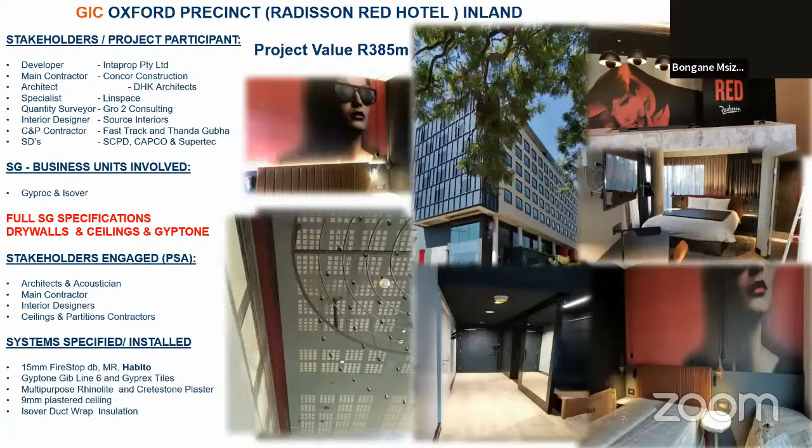Further to that, some of the projects we've done in Cape Town - I'm not going to go too much into it. Recently completed Radisson Hotel, all done in drywall, and some of the acoustic products with some Activ'Air technology as well. Also recently we've done a conversion of an office and a bank into a hotel, and it just happens to be called the Rosebank Hotel - it was a bank before.

We've listed the various stakeholders we've engaged with and some of the final images of the final installation there. And one of the biggest installations in Durban, again, high-rise buildings, lightweight opportunity, with the various stakeholders that have been involved there - obviously the size and the value of the project.

Yes, that will be the end of our presentation. You are welcome to suggest, make comments, and engage with questions, and I'll be able to help you answer them. Thank you.